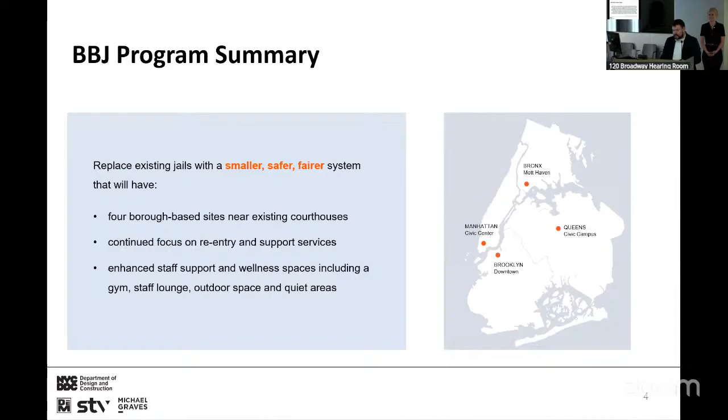The team here today has representatives from the DDC, our program management consultant, the AECOM Hill Joint Venture, or the AHJV, DOC, CHS, MOCJ, as well as City Hall, and our design builder, the DeMattis-led DB team. I'll now pass it off to Lauren Messier from the AECOM Hill Joint Venture. She's our outreach manager to discuss program-wide community engagement. Thank you.

Great, thank you Freddie. Hi everyone, good afternoon. My name is Lauren Messier. As Freddie just said, I'm the outreach manager for the Borough-Based Jails Program. Extensive engagement with communities and stakeholders in each of the 4 boroughs as a core component of our program, in addition to the broader team's ongoing collaborative work with city agencies and service providers.

Our team leads direct and proactive engagement with elected officials, community boards, justice advocates, and community advisory groups. Those typically consist of community leaders, community organizations, as well as the residents and businesses immediately surrounding the sites who are most impacted by the project. We also have dedicated staff embedded at each one of the sites to keep communities informed of day-to-day progress.

To date, we have held nearly 300 meetings and hands-on workshops with a variety of different groups. Engagement with our elected officials, community boards, and advisory groups will continue through construction completion in all of the boroughs. We are absolutely committed to that. In addition, we are currently in the process of holding design workshops with the communities in the Bronx, Manhattan, and Queens. We've already completed a series of workshops with Brooklyn.

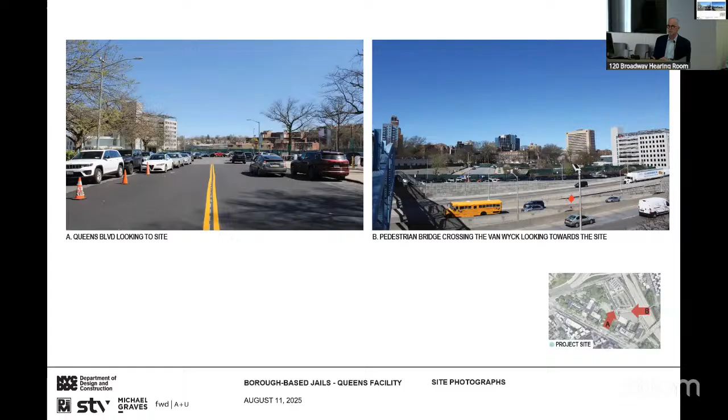It happens to sit on high ground overlooking the watershed of Corona Park and Flushing Meadow. The site itself is quite open with long view visibility from all sides, and the building will be a major landmark in the district.

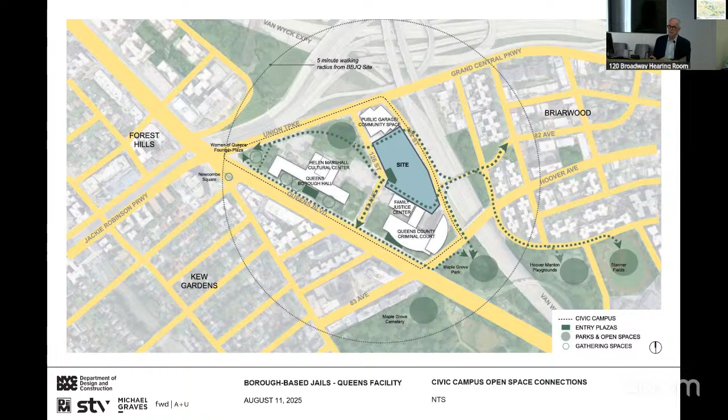When the site is infilled with our new building, it'll reinforce an existing pedestrian network that goes through the site, connecting across to Briarwood, and our aim is to reinforce that pedestrian experience with the landscape treatment.

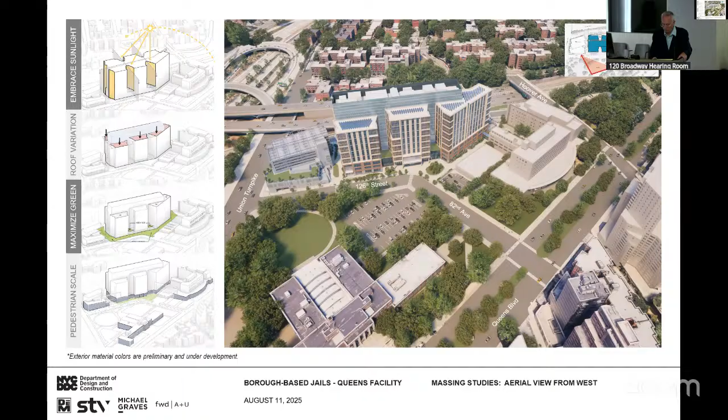This is an aerial perspective, a flat elevation that starts to show the main elements of the building. We wanted to keep the organization as clear as possible, break down the scale of the building, and reinforce the idea that this is a campus at ground level, reinforcing that pedestrian experience that Frank talked about.

To do that, we've broken the building down into 3 major components. The bottom 3 to 4 floors is the podium, which contains all the program spaces of the building and support spaces, things like admissions, main lobby, and so on.

The second part is the towers, which contain the cells and the population, as well as a continuous, glass-clad spine that unifies the design and connects all of these different pieces together, both building systems and building circulation.

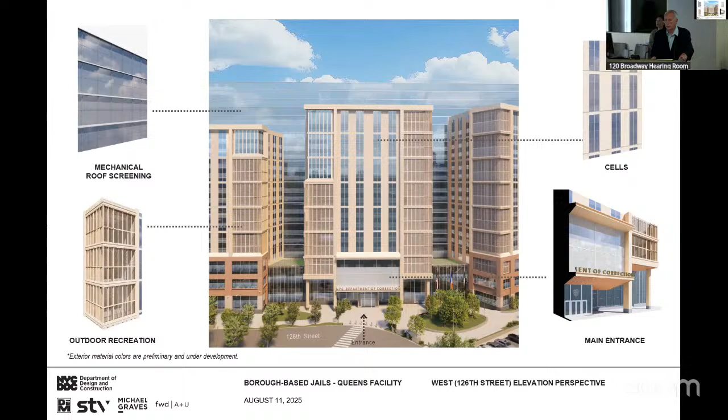Here's more detail of how the facades are composed. This is the main entrance facade in the center. Top right is the facades at the towers, showing how the windows follow the groupings of the cells. Bottom right is a cutaway section showing the entrance to the facility. Top left is the glass-clad, transparent and translucent glazing for the spine, and bottom left is the exterior recreation areas adjacent to each housing unit.

You also see, Joni will talk about this more, but see the way that the main plaza really is set back and engages the building at the ground level.

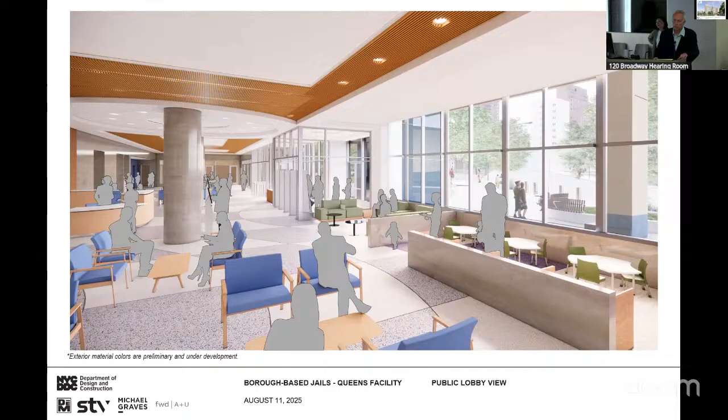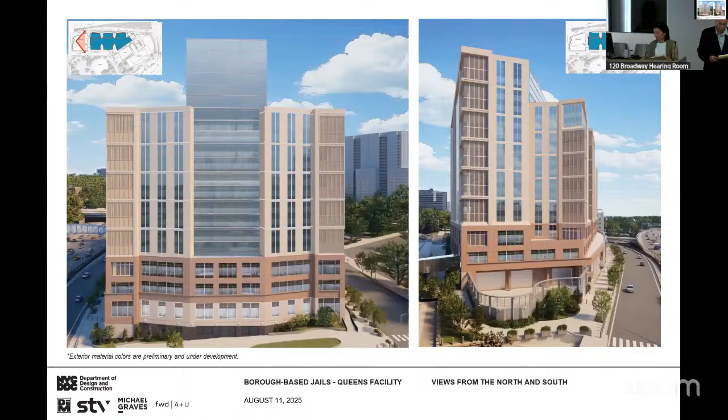Thank you, Tom. I'm Joni Fu of Fu Wilmers Design. I will take you through public realm design and landscape. Our goal is really to extend the Borough Hall Park, centered around the civic campus, to our site.

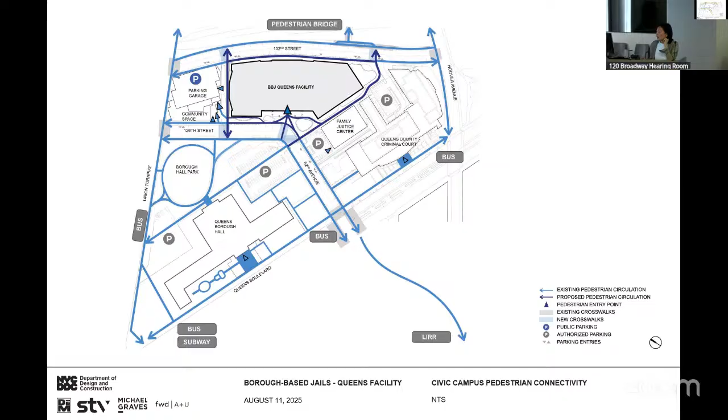Front entrance is directly off 82nd Avenue. Staff entrance and the community entrances and parking garage entrance are off 126th Street, directly across the park from Borough Hall. Vehicular entrances are all along 132nd Street, so there are no conflicts between pedestrian and vehicular circulation.

Here on the site plan, you can clearly see the spaces defined: a generous front plaza at the main entrance, and pedestrian passageway in a landscaped, garden-like environment, and 132nd Street at the back on top of the page. So we will take a quick walk around the building.

This is the 82nd Avenue entrance to the front of the building. To the front of the building, here's the staff entrance. If you're coming across the park, looking back at the staff entrance in Borough Hall Park again.

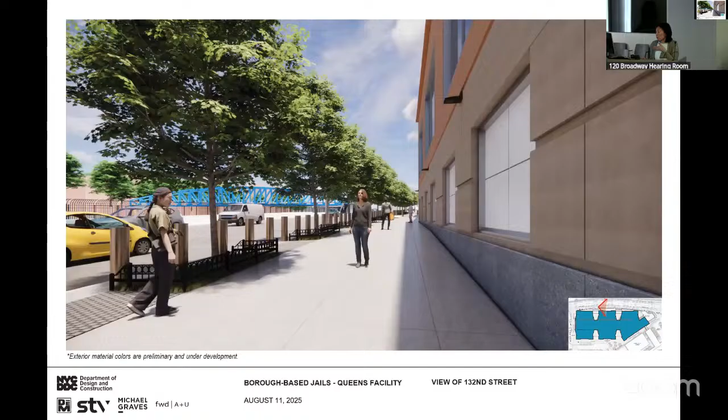This is the community passageway between our building and the parking garage, and 132nd Street with a view of the Briarwood pedestrian bridge. Coming off the bridge, you would have a landing park nearby the courthouse, and coming around the landing, bridge landing...

...you would enter this courthouse passageway looking towards Borough Hall Park at the end there, and coming around to the front of the building again with a very generous planting bed.

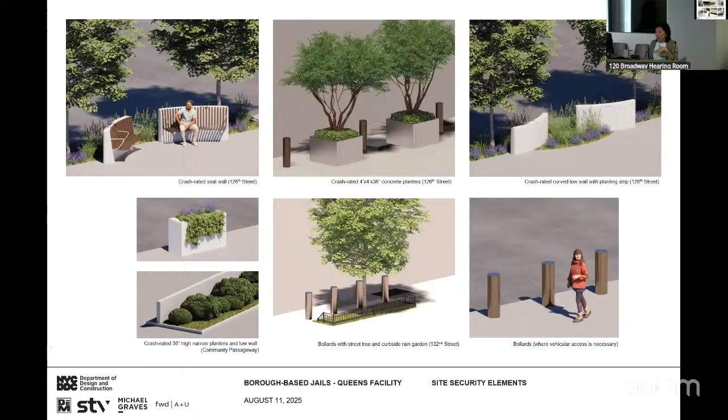All the security elements of the facility are carefully integrated into the streetscape. We have anti-ram walls, knee walls, planters, and whatnot, and bollards are only used intermittently and where necessary. The street lights and street furniture are DOT and DEP approved.

Colors are very neutral and understated to work with the architecture, and landscape is low maintenance and native plants. Green infrastructure and sustainability is considered throughout the design. We will end with a view, the main entrance view here.

So at the back of the Borough Hall is this generous park, and we're divided from the park by 126th Street, which is streetscape per DOT standards with street trees and tree pits. Instead of bollards, we have knee walls with some benches mounted on them, facing the sidewalk, plus seating underneath the trees, and seats mounted around the two planters.

Do you anticipate the primary use of those seats will be people visiting and using this facility, or are they designed to be more broadly used for people working in Borough Hall or elsewhere in the neighborhood?

There is some seating in the existing Borough Hall Park, but not a lot. The seating here is probably more for people waiting or coming and going to our building, which is why it's focused near the entranceway. We also have seating in the community passageway between the staff entrance and the community space, specifically to address community use there, and less so elsewhere, since that's where we imagine most people would gather.

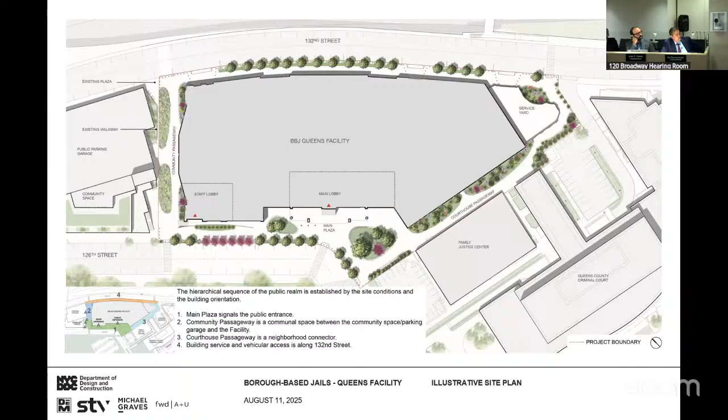I was going to do number of beds. To clarify on program changes since the last presentation to the commission back in June, which was for the Bronx facility, my name is Taylor Wolfson-Ospen, nice to be here. There are some programmatic differences between the Bronx and Queens facilities in that they have the same number of beds, both 1040, but the Queens facility does have women's, as mentioned, which the Bronx facility does not. Other than that, there have been no changes from what was approved by ULURP back in 2019.

In terms of lighting, on 132nd and 126th Street we're using DOT standard street lights. In the front main plaza area we'll have tall pedestrian poles, and we also have lighting for the 3 flag poles. For the pedestrian passageway, we're using building-mounted lights, similar to Rockefeller Center, mounted above the first floor. The reason is we want to save the precious pathway or sidewalk space, so it's well lit but doesn't take up the ground plane. So all the surrounding site lighting has been considered.

When you say well lit, even during wintertime, were your calculations based upon that? Absolutely, yes.

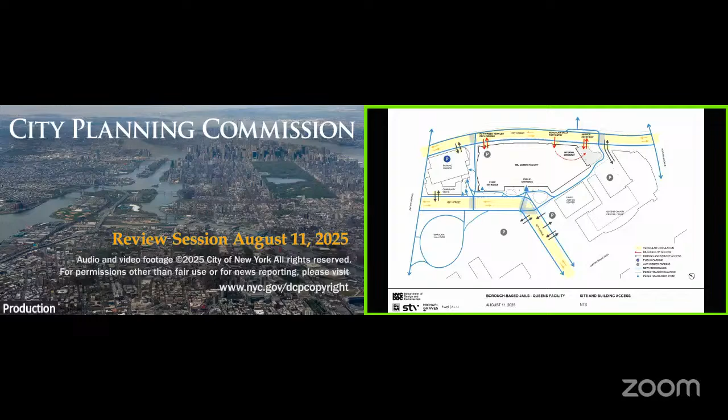Well, that's what we're planning for. And my second question, I'd still like to know where that, not just the loading on the buses, but where within the facility, presumably on the first floor, the intake when detainees come back from their court dates and before they leave, when they are assembled and whatever administrative work is done to make sure that the right detainees are at the right place at the right time on the right bus. It's extraordinarily complicated, what you just mentioned.

It's what we've spent the last 18 months sorting out with Department of Correction. And it's doubly complicated because you have men and women in those same streams and they can't touch, they can't see each other. So we've developed a throughput piece on that, and we're actually in pretty good shape right now. Alex, I think we've got it sorted, because you're right, in and out are both very complicated. And as well as the walking across the bridge into the Queens Courthouse. So we've got all these different streams, and I think we've solved it, but I'll let Alex speak to the officers themselves who have to have access to this whole area, but others can't leave.

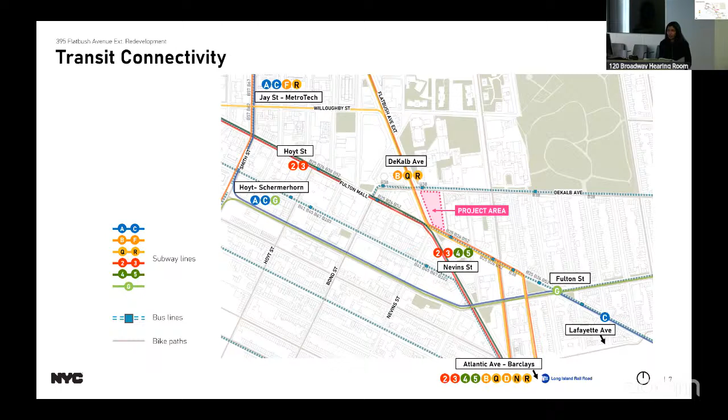The project area is located within the Special Downtown Brooklyn District, established in 2001 under the Unified Bulk Program, which exempted the area from certain height limits, instituted modest density increases from manufacturing to commercial and residential districts, and mapped contextual transition areas alongside the edge of the CBD.

Subsequently, as part of the 2004 Downtown Brooklyn Plan, high-density zoning was put into place to facilitate growth of the Central Business District. Blocks surrounding the project area are predominantly zoned with higher density commercial districts, C5-4, C6-4, C6-4.5, and C6-9, as well as mid-density residential districts R6, R6B, and R7A along the periphery of the CBD.

The project area is located in a C6-4 zoning district, a high-density, non-contextual district allowing a range of commercial, residential, and community facility uses. C6-4 districts mapped within the special district are governed by tower regulations or special height and setback regulations. The site is also subject to other mandatory district requirements such as street wall continuity, curb cut restrictions, etc.

The entire Central Business District is located within the inner transit zone, where no parking requirements are mandated for new residential buildings.

The project area is currently improved with a 7-story, approximately 307,000 square foot commercial building constructed in 1974. The building has 274,000 square feet of commercial office space, which currently houses a Verizon call center, and approximately 33,000 square feet of ground floor retail. There is a below-grade public parking garage with 140 parking spaces.

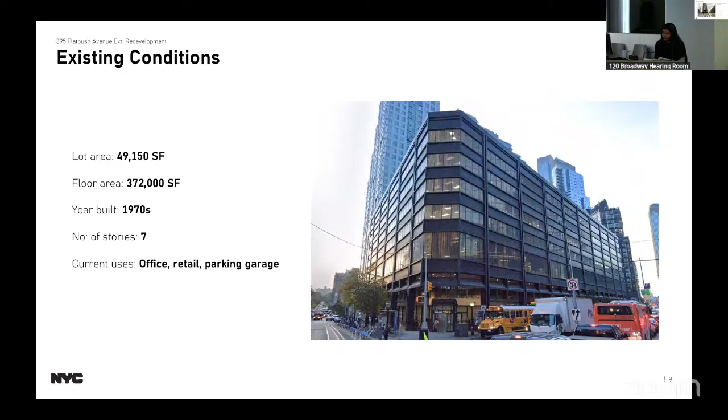This is a view along Flatbush Avenue at Fulton Street looking north. The project area is to the right of the image. And this is a view looking towards the south along Flatbush Avenue. The 80 Flatbush, 505 State Street development is seen in the background.

This is a view looking along the existing arcade at Flatbush Avenue looking south. And this is a view from Fox Square at Fulton Street looking east. The dedicated bus lane runs along the project area to the left of the image.

This is a view from Fox Square Plaza, located at the corner of Flatbush and Fulton, looking towards the development site.

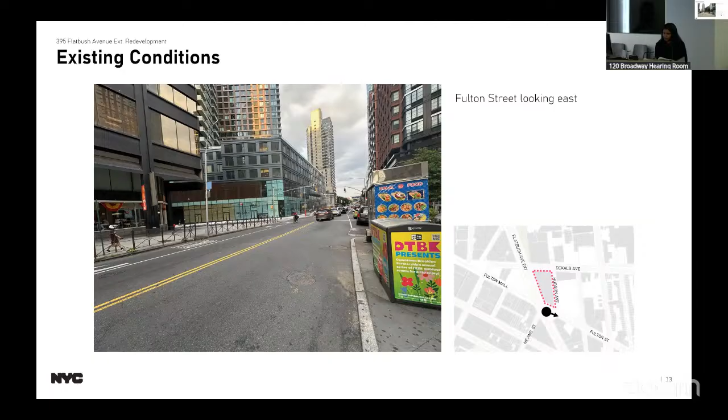This is a view along Hudson Avenue, looking north towards DeKalb Avenue. The recently constructed 625 Fulton development is located on the right side of the image.

And this is a view of Hudson Avenue looking south. The existing curb cuts and parking garage entrances are seen on the right.

Here is a view of DeKalb Avenue looking west, with the Paramount Theater seen on the right side of the image. And this is a view of DeKalb Avenue looking east towards Fort Greene Park. The LIU campus is seen on the left.

And this is a view of the existing subway station entrance on site, which is to remain at the corner of DeKalb Avenue and Flatbush Avenue.

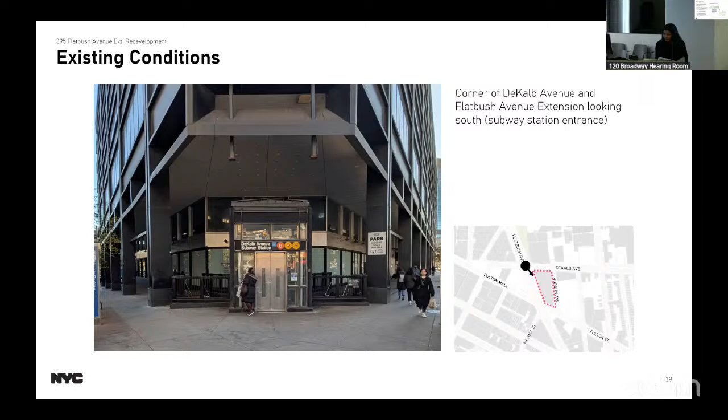Planning and investment efforts over the last two decades to stimulate development in downtown Brooklyn has spurred significant increases in housing and job growth. In an effort to help guide the DB's continued evolution and highlight its important role in the borough and region, the department presented the EDS and MEDS framework to the CPC in 2023. The framework identified goals and opportunities to implement new highest density zoning tools, promote an economically equitable, diverse, and integrated neighborhood, and explored redevelopment opportunities on public land to facilitate affordable and mixed-income housing, job space, and community-serving uses, specifically in the educational and medical sectors.

The proposed development at 395 Flatbush is a 72-story, 1 million square foot mixed-use development with approximately 933,000 square feet of residential floor area, 141,000 square feet of non-residential floor area, and approximately 4,700 square feet of public open space. The building would contain approximately 1,263 apartments, of which 325 to 379 would be income restricted pursuant to MIH.

Roughly 66,000 square feet of retail space is proposed on the first and second floors, and approximately 75,000 square feet of commercial office or community facility is anticipated on the upper floors of the podium. The non-residential space is currently contemplated to be occupied by a DOHMH facility with anticipated uses including a medical clinic, offices, community facility, and labs.

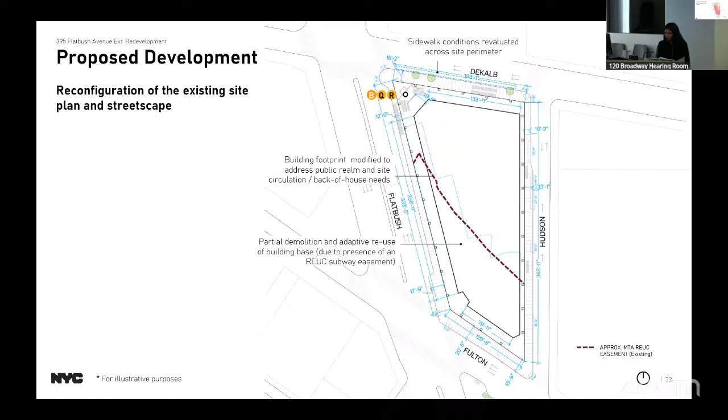The proposed development will eliminate the existing arcade, pulling the street wall to the property line, bringing the retail to the sidewalk to be more inviting and visible. The proposed development will also include expanded sidewalks, particularly along Flatbush Avenue, up to 18 feet to increase pedestrian circulation space, achieved by eliminating the parking strip along Flatbush Avenue in coordination with DOT.

The residential lobby would front on DeKalb Avenue at the corner of DeKalb and Hudson, while the commercial lobby entrance is located directly east of the DeKalb Avenue subway station entrance.

Ground floor retail uses are proposed along Flatbush, Fulton Street, fronting the open space, as well as on the southern portion of Hudson Avenue. Similar to the existing conditions, the loading berths and parking access will remain located along the development site's Hudson Avenue frontage.

The partial demolition of the building will also facilitate the creation of a 4,700 square foot public open space. The open space location at the prolongation of Fulton Mall is intended to contribute to the existing public realm network while enhancing the retail environment at this important intersection.

The open space will be designed to support pedestrian movement, integrate seating, and introduce landscaping that contributes to the district's transformed public realm and enhances connections between surrounding open spaces. The open space design has been developed in consultation with DCP and is to be further refined through the Public Design Commission's approval process.

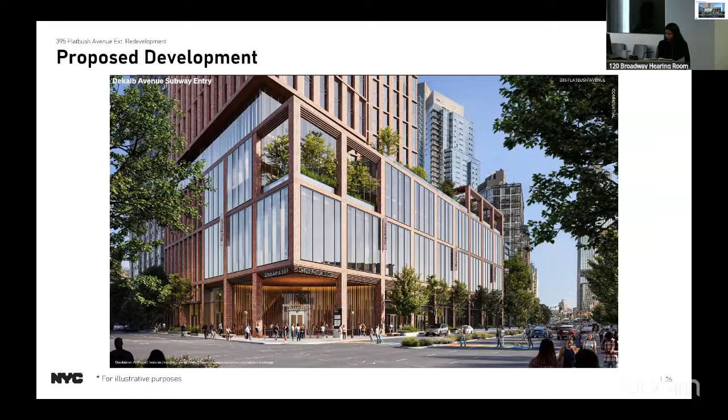This is an illustrative view of the proposed development along the Flatbush Avenue frontage. The building base is expected to continue to have a strong non-residential presence with ample glazing.

And this is an illustrative view of the proposed development and open space along the Fulton Street frontage. The proposed development is anticipated to be 100% electric and is targeting sustainability certifications such as LEED and WELL. As noted earlier, a significant portion of the podium structure is anticipated to be reused, taking advantage of the embodied carbon of the existing building.

The recent City of Yes for Housing Opportunity text amendment introduced new zoning districts such as C6-12 that have increased the permissible residential FAR to greater than 12 FAR, which was previously prohibited due to the New York State multiple dwelling law cap, which has since been eliminated.

The applicant is proposing to rezone the project area from a C6-4 district to the newly created C6-12 zoning district, as further modified by the special district and in conjunction with a proposed zoning text amendment. The zoning district boundary would encompass the entirety of Block 2093, bounded by the center lines of the surrounding streets.

The applicant is also seeking to modify the floor area provisions to permit greater FARs than allowed in the underlying C6-12 regulations if certain conditions are met, which I will walk through in the forthcoming slide.

The proposed C6-12 zoning district within the downtown Brooklyn district will be governed by height and setback regulations of the special district, which allow either standard height and setback regulations up to a maximum height of 395 feet with qualifying affordable housing, or tower regulations. Under tower regulations, towers located above the base in C6-12 zoning districts are regulated by lot coverage with no set maximum height limits.

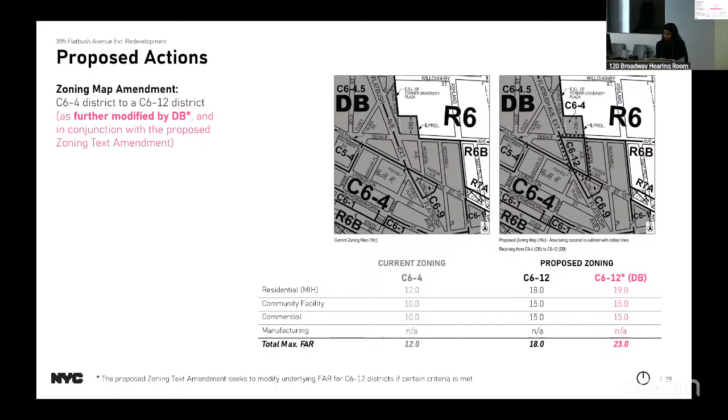The applicant proposes amendments to the special downtown Brooklyn district's floor area, bulk, and mandatory district plan elements to facilitate the proposed development. First, the text amendment proposes to create a new defined term, large qualifying site, which is zoning lots that occupy an entire block or are a minimum of 30,000 square feet with at least one full block frontage along a street. On large qualifying sites, the C6-12 district, as modified by the special district, would permit a maximum FAR of 19 for residential, 15 for commercial and community facility uses, and a total maximum FAR of 23.

The proposed FAR regime is intended to permit increased housing capacity that would include affordable housing subject to the MIH program, while also providing additional floor area that may be used for retail and additional commercial or community facility establishments that are intended to help further the goals of the DB and special district.

The applicant is proposing to modify setback requirements for zoning-defined large qualifying sites that have below-grade transit infrastructure occupying more than 30% of the zoning lot. Up to 30% of the total street wall width of the development would be exempt from setback requirements. This would provide a pathway for sites constrained by significant infrastructure to accommodate viable building forms, particularly for developments which have certain dimensional and vertical circulation needs.

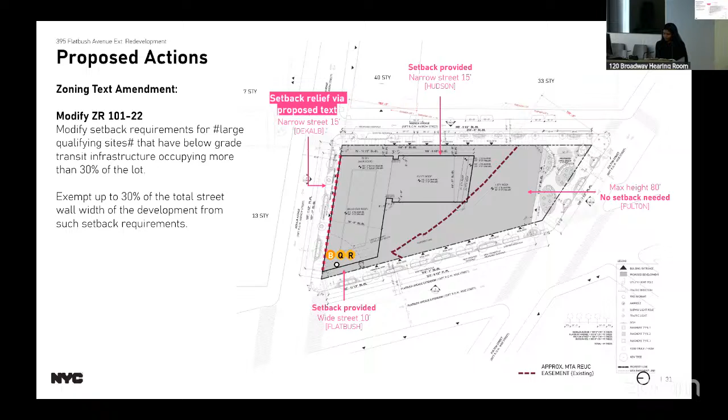Currently, the special downtown Brooklyn district mandates a continuous street wall at certain locations, including along the project site's Flatbush and Fulton frontages. The applicant is seeking to amend the street wall location provisions. The proposed modification would provide exemptions from the street wall location and continuity requirements for zoning-defined large qualifying sites if publicly accessible open space is provided.

A zoning text amendment is proposed to Appendix F to establish the project area as an MIH area. The applicant proposes to map MIH options 1 and 2. Under option 1, at least 25% of the residential floor area must be permanently affordable to households with incomes at a weighted average of 60% AMI. And under option 2, at least 30% of residential floor area must be permanently affordable to households with an income at a weighted average of 80% AMI. The applicant proposes utilizing MIH option 1.

HPD and DCAS are seeking a disposition action to allow Brooklyn Block 2093 Lot 1 to be conveyed to a sponsor selected by HPD. DCAS and DOHMH are seeking site selection and acquisition approval to facilitate the location of a potential clinic and office space for DOHMH. DOHMH is in need of additional clinic and office space to expand, modernize, and streamline their services in downtown Brooklyn. Given the proposed development's location with access to several transit resources, a potential DOHMH clinic within the building base was identified as an effective option for consideration.

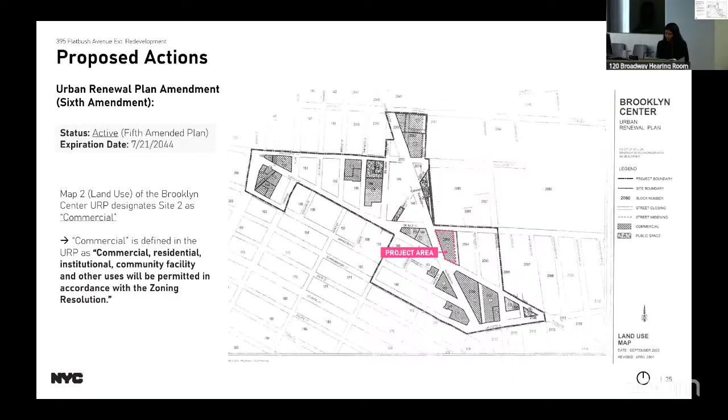The applicant is seeking to amend the Brooklyn Center URP. This would be the sixth amendment. The applicant is seeking to extend the plan's duration to 99 years from the date of approval of the Sixth Amendment. The applicant is also proposing modifications to Section 3A, Supplementary Controls on Sites. The URP would require that a portion of the project area, Site 2, be developed as open space accessible to the public, as approved by HPD and in consultation with CPC.

Pursuant to Local Law 78 of 2021, this application requires a racial equity report. The project area is located in the Fort Greene neighborhood tabulation area, and the displacement risk score is intermediate. As of 2021, the median household income in the neighborhood is approximately $119,000, significantly higher than the New York City median of around $70,000. The applicant is proposing MIH option 1 with incomes at a weighted average of 60% of AMI.

The income of households occupying the proposed income restricted units is estimated to be within the range of $45,000 to $162,000, and the monthly rent would be between approximately $1,100 and $3,600.

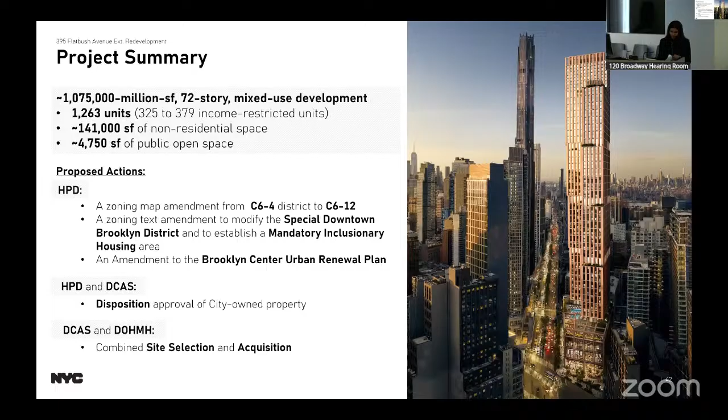A lot in there. I have just one question, and then I'm going to go to Commissioner Benjamin, perhaps others. On the urban renewal plan expiration and renewal, two things. One, you noted that there will be a new provision included in the urban renewal plan that a portion of Site 2 will be accessible to the public.

As open space, correct? That's right. That's a new provision. That is correct. And that's something that could be incorporated through the amendment to the urban renewal plan.

That's right. And how big a portion would be reserved to the public as anticipated in this amendment? The amendment doesn't specify how much open space, it just requires that some amount of public open space be located. In this case, the applicant is proposing roughly 4,700 square feet. Okay.

But under the urban renewal plan, if they ended up doing 10 feet, it would be consistent. Yes, there is no minimum specified. Right, okay, got it. Okay, I mean, I do think it's a good addition. I think we should include that in there.

Okay, and then the renewal or the extension of the term. How should the commission think about the extension of an urban renewal plan that's set to expire in 2044 and to bump it out to 99 more years? Sure. In this case, the applicant is expecting to renegotiate a ground lease with the potential sponsor, and this is supposed to be a 99-year term, and therefore they are seeking to amend the plan duration to be coterminous with that new ground lease term.

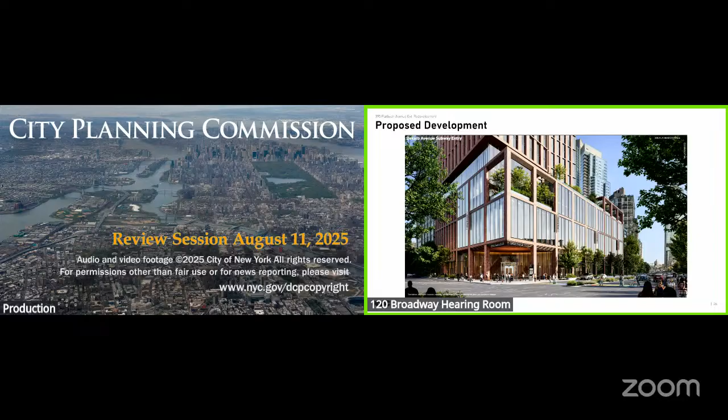Not having spent a lot of time studying the subway station, but just found it a little peculiar given the density here and the important subway station that wasn't more integrated into the overall development framework.

And then just last question on the 18 versus 19 FAR. I found this one a little bit head-scratching. So the new zoning district, the C6-12 that was created, has an 18 FAR base for residential. That's right. And here for large sites, HPD is proposing 19. Is there a logic to that?

Yes, so the proposal seeks to increase the overall amount of residential by around 1 FAR, which we believe adds an additional FAR to what would generate MIH, and the overall max also goes up by roughly 5 FAR, which allows for additional non-residential in the podium of the development. So that's kind of the logic behind the regime here.

Okay, but I'm not sure how the additional FAR of residential adds more FAR of non-residential. Sorry, no, I mean the total max, not the residential. The residential is just a 1 FAR increase compared to the as-of-right C6-12 regulations.

Got it. Okay. Yeah, I'm not sure I totally follow the logic on this point. Not that I'm disputing the 19, just trying to understand why, after we just created the zoning district, we're creating new FARs for that district that was just created. So I guess we'll wait for the public hearing to conclude the suspense on that question.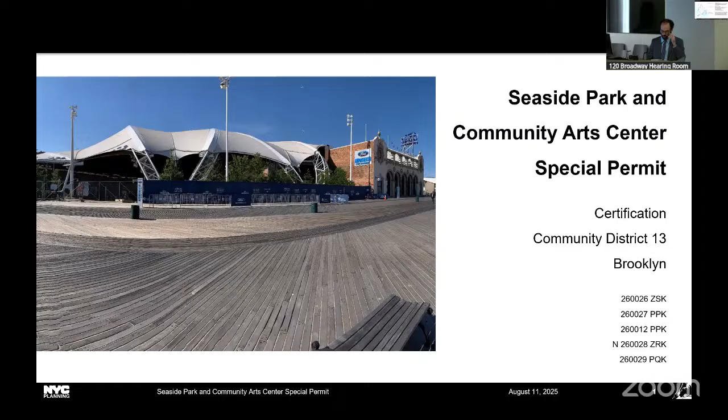The project before you today is the certification of the Seaside Park and Community Arts Center special permit. There are three applicants for this project: the private applicant, Seaside Park LLC, as well as the New York City Economic Development Corporation, or EDC, and the New York City Department of Citywide Administrative Services, or DCAS. The project is located at 3054 West 22nd Street and encompasses 15 tax lots in Block 7071 in Coney Island, Community District 13 in Brooklyn. It is located in City Council District 47, the district of Councilmember Justin Brannan.

The proposed development includes approval of the Coney Island Amphitheater via a new special permit with waivers for signage, parking, and loading, as well as a series of acquisitions and dispositions that will enlarge the project area to include additional open space on this site.

There are five actions being requested today by the applicants. The first is a zoning text amendment to multiple sections of the ZR to allow the CPC to permit an arena by special permit. The second is a special permit application for said arena. The third action is the acquisition of a portion of Block 7071, Lot 123. Finally, there are two separate dispositions: one restricted by the conditions of the special permit for the entirety of the project area, and another separate disposition of the adjacent Child's building and a small sliver adjacent to it, which is not restricted to the conditions of the special permit. These actions are being sought to allow the continuation of the existing Seaside Community Arts Center, an expansion of Seaside Park, and to reflect changes to the site since its original approval in 2013.

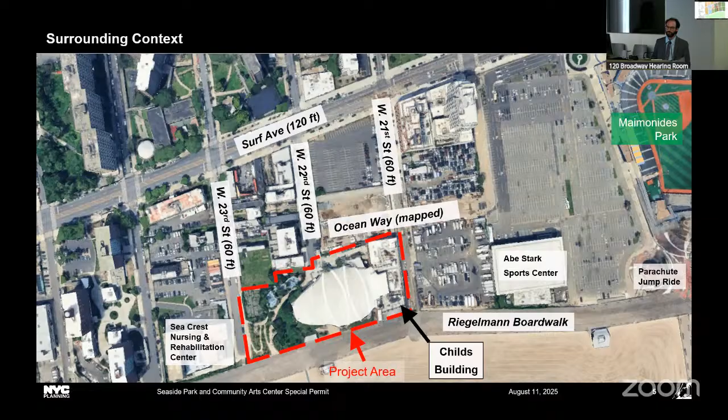This is an area map showing the project area outlined in red. Land uses in the surrounding area vary significantly, as much of the area is under construction for the goals of the Coney Island rezoning plan, which I'll discuss in a moment. Retail uses are concentrated to the north along Surf Avenue, whereas several institutional and utility uses are located directly to the west of the project area.

Existing infill developments in the neighborhood range in height from 1 to 6 stories, whereas several tower-in-the-park style NYCHA and Mitchell-Lama developments are present in the area and rise to between 13 and 22 stories in height.

The zoning of the project area is split between an R5 district, generally mapped to the west of West 22nd Street, and an R7D C24 district mapped to the east over the Childs building. On Parcel B within the Coney West subdistrict, which is the eastern part of the project area, R7D districts have a maximum permitted FAR of 4.8 for standard residences and 5.8 for buildings including qualifying affordable housing. Within 70 feet of the boardwalk, the maximum base height is 40 feet, and the maximum transition height further from the boardwalk is 95 feet. Above 95 feet, tower regulations apply.

C24 districts permit all local retail uses as well as offices and select laboratories. When mapped over R7D districts, commercial uses are permitted up to 2.0 FAR. 1 parking space is required per 1,000 square feet of commercial floor area, and parking requirements are waived when fewer than 40 spaces are required. You can see to the east here, per the C24 overlays, a number of streets which are mapped as part of the Coney Island rezoning plan and are proposed for construction and under construction, and I'll go over these more in a bit.

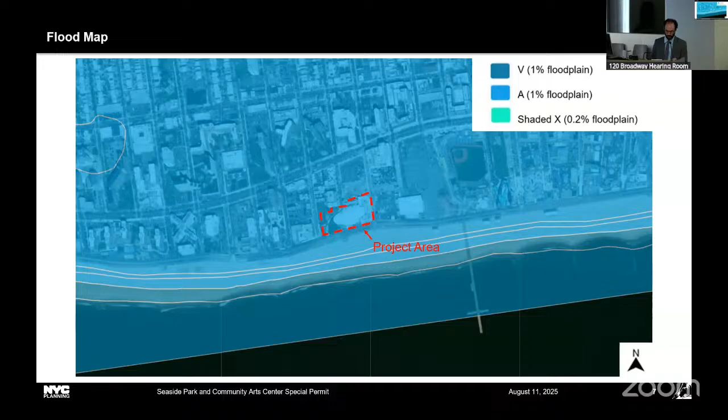The Coney Island Comprehensive Rezoning Plan was approved in 2009 and created the Special Coney Island District, as well as the Coney West Subdistrict, which is the home of our project area today. The comprehensive plan was intended to facilitate a year-round amusement and entertainment district, ensure redevelopment of vacant and underutilized land in the area, strengthen Surf Avenue as a central retail and pedestrian spine, support Coney Island's unique character, and facilitate economic revitalization of the peninsula.

3 sub-districts were created in 2009: the Coney East Sub-District, which is the heart of the amusement area; the Coney North Sub-District, which is designated as a mixed-use residential and retail area along Surf Avenue connecting Coney East and Coney West; and finally, the Coney West Sub-District, the home of our project area today.

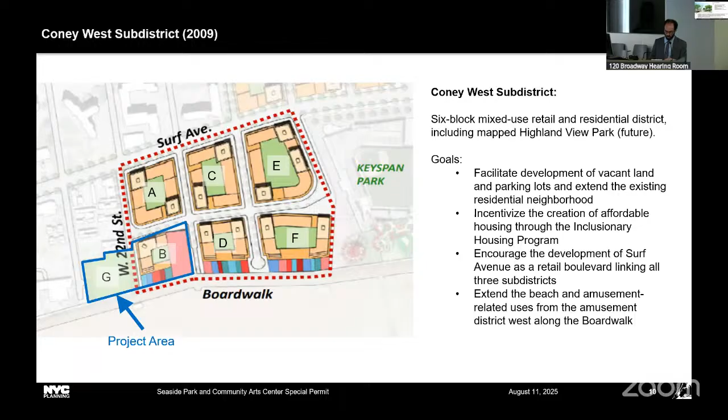In 2013, the CPC approved 7 actions within the Special Coney Island District, including the enlargement of the Coney West Sub-District to include the aforementioned Parcel G, to facilitate the development of public open space and the restoration of the Child's Building.

Further, included in the project was the creation of a special permit to allow an amphitheater for up to a 10-year term. The goal of siting an amphitheater in this location was to create a temporary active use that would stimulate the underutilized area while the infrastructure and sewer improvements were made that were necessary to realize the vision of the Coney West Subdistrict.

The special permit was granted for a 10-year term, and a temporary Certificate of Occupancy was granted in 2016, which marked the beginning of that 10-year term.

Since 2016, the Coney Island Amphitheater has promoted and held approximately 150 ticketed events, 30 free shows, and 160 graduation ceremonies, featuring some of the most famous acts in the country.

The Child's Building has hosted events and weddings, and when it's not reserved for special events, it serves the public as a full-service restaurant.

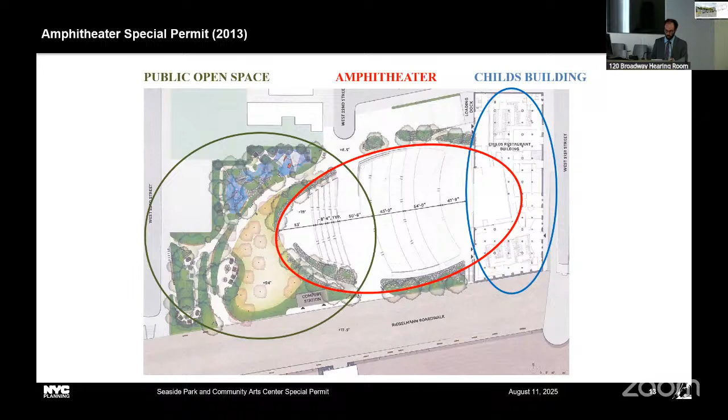So that takes us to where we are today, and I'd like to show you at this point a few photos of the site. I'm going to begin by showing photos of the periphery of the site, looking into it, moving counterclockwise, before showing a few photos of the interior of the site itself.

This photo here shows the amphitheater itself, with the historic Childs Building in the background, as seen from the boardwalk.

This photo shows the roof structure of the amphitheater, which is proposed to be permanent during on and off seasons. This photo also shows fences and a visual screen beyond the metal detectors. These items were not part of the original 2013 approval, but have been added to the site since.

This image shows the historic Childs Building looking north along West 21st Street as seen from the boardwalk.

This photo shows essentially the opposite view of our previous image. This shows the Childs Building on the right looking south towards the boardwalk along West 21st Street.

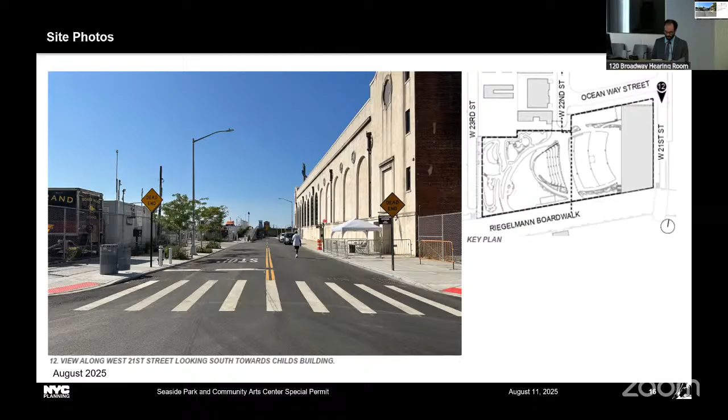This image shows a view of the project area from West 22nd Street with newly constructed Ocean Way to the left. Here you can see the end of the street and the southern entrance to the amphitheater. The sound curtains around the periphery of the amphitheater can be seen in this image as well.

This image shows the public open space in the background, but seen in the foreground are two tax lots, lots 79 and 81, that are now being added to the project area and will be redeveloped into an expansion of the existing open space.

This image shows another view of the open space on the site from across West 23rd Street. Beyond the fence are the two lots discussed in the previous slide that are now being added to the project area as expanded open space.

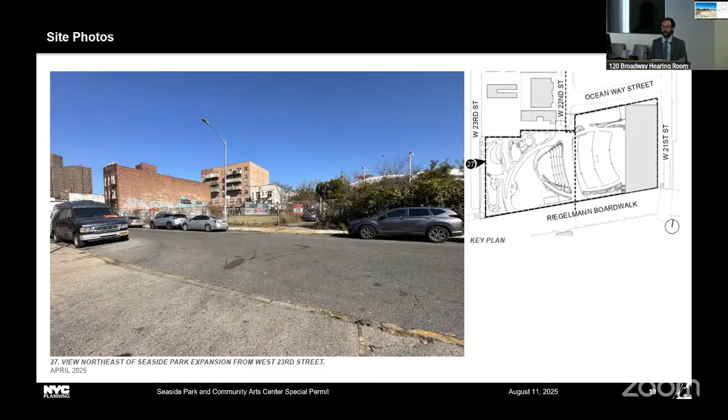I'd like to now show some photos of the interior of the site. This image shows one of the pathways within the public open area within Seaside Park. And this image shows a constructed playground located within the northern portion of the public open space.

I'd like to now show some photos of the interior of the amphitheater itself. This is an image of the amphitheater looking south from West 22nd Street towards the boardwalk. Here you can see the bleachers at the rear, which serve as additional seating during events.

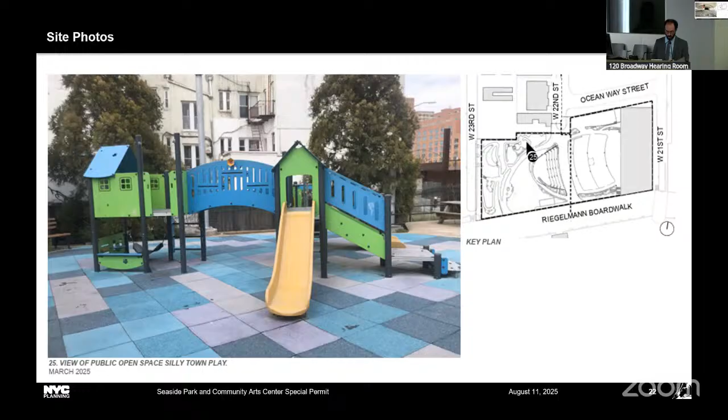This is an image of the amphitheater facing east from the rear towards the stage, which is built into the interior of the adjacent Childs Building. And finally, this is an image of the amphitheater facing north towards West 22nd Street.

This pathway connects West 22nd Street to the boardwalk and is accessible to the public when events are not being held. You can also see a sound curtain at the periphery of the amphitheater, which is proposed to remain year-round.

The applicant is proposing approval of the Coney Island Amphitheater per a new special permit, with waivers for signage, parking, and loading. The special permit application will also codify existing conditions on the site.

Additionally, the proposal includes a portion of Lot 123 adjacent to the Childs Building, as well as the enlargement of the project area to include the additional open space on Lots 79 and 81, which are seen here in gray.

You can see here the proposed design for that expanded open space, outlined in that white dotted line. This area will feature an at-grade entrance along West 23rd Street, as well as an accessible path that connects to the existing pathway on Seaside Park.

The EDC has confirmed that they have coordinated with the Public Design Commission and the Department of Parks and Recreation on the open space design in this area.

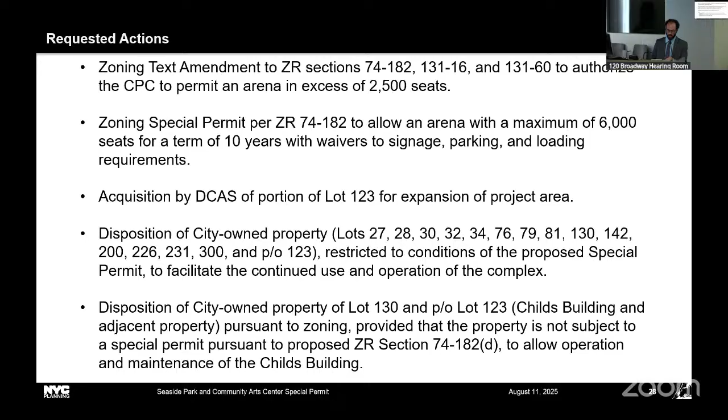The zoning text amendment makes changes to Section 74-182, 131-16, and 131-60. The proposed text moves the special permit from Article 13, Chapter 1, which is where regulations on the Coney Island Special District live, and moves them to Article 7, Chapter 4, which is where special permits for arenas, auditoriums, stadiums, and trade expositions live citywide.

These changes would result in a simplified special permit text that ensures operational use and functionality of the facility while also allowing flexibility for a future operator. The proposed text amendment aligns most of the conditions and findings with those for other similar facilities and removes aspects of the existing amphitheater special permit text that require components of the project that are no longer operationally feasible, such as the removable roof.

During the off-season, when events are not being held, the amphitheater will remain publicly accessible. The interior walkway and corridor will provide access from West 22nd Street to the boardwalk when events are not being held, as previously mentioned.

In the middle of the site is the amphitheater, which will remain essentially as it exists today. To the west, Seaside Park will be expanded to include lots 79 and 81, shaded in orange. Shaded in blue to the east is the historic Childs Restaurant building, which will continue to be tenanted with eating and drinking uses and houses the stage for the amphitheater.

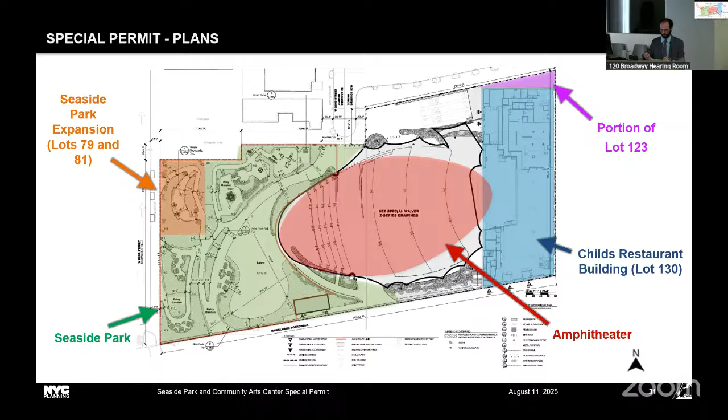This image shows the floor plan for the main floor of the historic Childs Building located to the east of the amphitheater. Note that we're now facing east, not north, with the amphitheater at the bottom of your screen. Again, you can see the stage is housed within the Childs Building.

You can also see the development of the building as a restaurant accessible from the boardwalk. Adjacent to the building, shown in purple, is the aforementioned portion of Lot 123 that will now be acquired and disposed of along with the Childs Building.

Per the special permit, waivers of underlying parking, loading, and signage regulations are being sought. Regarding parking, the underlying zoning requires 66 parking spaces, and according to the applicant there is sufficient public transportation and ample parking in the neighborhood, negating the need for this additional parking. As such, no on-site parking is being proposed.

Loading and signage waivers are also required, and I'll go over these details in the next slides. Generally, loading waivers are requested due to not the number of berths provided, but their location. Finally, signage waivers are required to allow a greater square footage of signage, as well as a waiver from underlying locational regulations on signage.

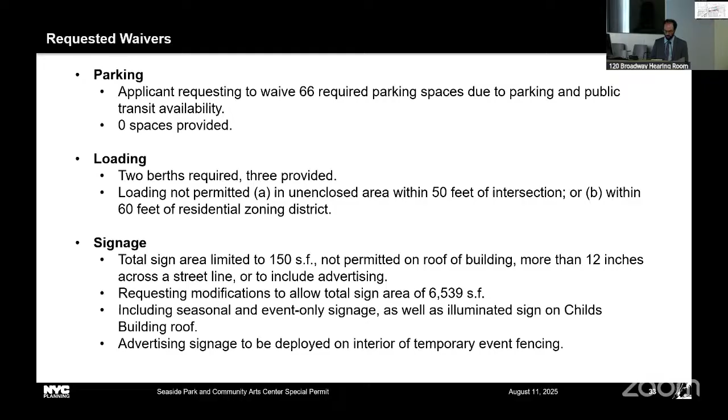To speak more to the loading waiver, the applicants are proposing an off-street loading area with 3 berths. This exceeds the 2 berths required by zoning. However, the loading area is located in an unenclosed area within 50 feet of the intersection of West 22nd Street and Ocean Way, and would be located within 60 feet of a residential zoning district. Loading berths as proposed in these areas are not permitted by the underlying zoning, and therefore a loading waiver is requested.

For the underlying signage regulations, total sign area is limited to 150 square feet per frontage. Further, signage is not permitted to be mounted on the roof of a building, to project more than 12 inches across a street line, or to include advertisements.

The applicants are requesting modifications to allow a total sign area of 6,539 square feet, including seasonal and event-only signage, as well as permanent signage for the provision of an illuminated sign on the roof of the Childs Building. Further, the applicants are proposing advertising signage to be deployed on the interior of the temporary fencing erected during events. As such, a signage waiver is being requested.

Here I will discuss the zoning text amendment and special permit actions being requested. Below is a summary of the new findings. To approve the special permit, the CPC must find the following: first, that vehicular traffic will be minimized through residential areas, and there will be consideration of rapid transit infrastructure to serve the proposed use. These conditions are standard for all arenas, auditoriums, and stadiums throughout the city.

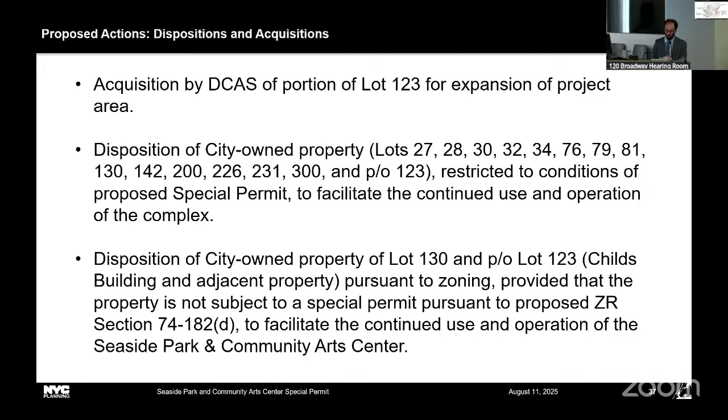This disposition is proposed to include the expanded project area, including the new lots 79 and 81, as well as the newly acquired portion of Lot 123.

The intention is for this disposition to be utilized only after the amphitheater is no longer in use, so that the Childs Building can continue to be maintained and tenanted, regardless of the expiration of the special permit governing the amphitheater.

In summary, the applicants are requesting 5 actions: a zoning text amendment to authorize the CPC to permit an amphitheater via special permit; an application for said special permit to allow the amphitheater; an acquisition of a portion of Lot 123; a restricted disposition of the full expanded project area; and a separate disposition of Lot 130 and a portion of newly acquired Lot 123 to allow maintenance and operations of the Childs Building unrestricted to the conditions of the proposed special permit.

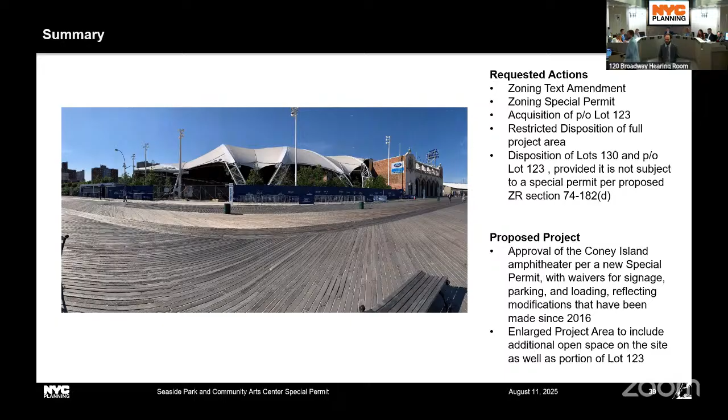Great, let's move on. The third item on our agenda is a certification of zoning map and zoning text amendments in Queens Community District 1. Our presenter is Colin Ryan. Hello, Colin. Good afternoon, everybody.

This is a private application by the Catholic Medical Mission Board, CMMB, in the Ravenswood section of Queens Community District 1, on the properties located at 3301, 3302, and 3310 11th Street. The applicant proposes a zoning map amendment from an R5 to a special mixed-use district designated MX23, pairing an R7A residential district with an M14 manufacturing district.

Additionally, the applicant proposes a zoning text amendment to map a mandatory inclusionary housing area. These actions would facilitate the development of a new mixed-use 10-story development with approximately 14,000 square feet of light industrial, 9,000 square feet of commercial, 3,300 square feet of community facility, and 258 dwelling units, 77 to be made permanently income restricted pursuant to option 2.

The community facility and light industrial space would be operated by the Catholic Medical Mission Board for their offices and food distribution operations, while providing additional retail space and housing, including affordable housing.

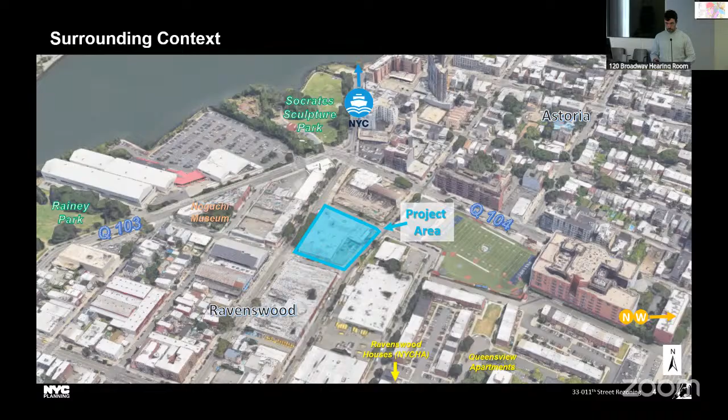In 1961, the project area was mapped to its current R5 district, despite the strong industrial nature of this area of Ravenswood. Blocks directly to the north, west, and south have been rezoned in recent years to include medium-density residential districts mapped with MIH. In the case of the blocks to the north and south of the project area, the sites were rezoned to mixed-use districts within the special MX23 district, as proposed for this project area. I'll speak more on this on the next slide.

The surrounding area consists of a mix of industrial, residential, commercial, and community facility uses. South of Broadway and west of 13th Street is predominantly industrial, while north of Broadway is predominantly mixed use and residential.

Here we have a closer view of the project area in context with its immediate surroundings. The western portion of the project area is currently improved with the one-story warehouse occupied by the Catholic Medical Mission Board's distribution center. The eastern portion is improved with the one-story garage occupied by automobile repair uses.

The blocks directly to the north, west, and south of the site are all single-story warehouses, but were the subject of rezonings within the last 7 years. The Commission may remember the 2018 Vernon Boulevard and Broadway rezoning to R7A C13 and R6B on the block to the west, the 2021 Broadway and 11th Street rezoning to M14 R7A on the block to the north, and the 2022 11th Street and 34th Avenue rezoning to M15 R6A to the south.

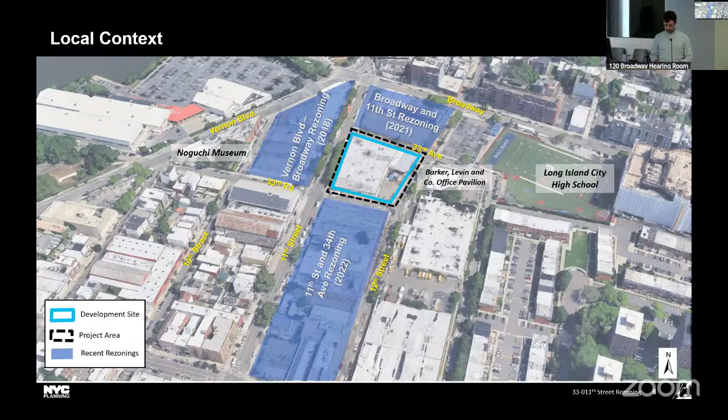Here is another view, this time looking at 12th Street, facing southwest from the development site on the right, and the landmarked Barker, Levin and Co. Office Pavilion on the left.

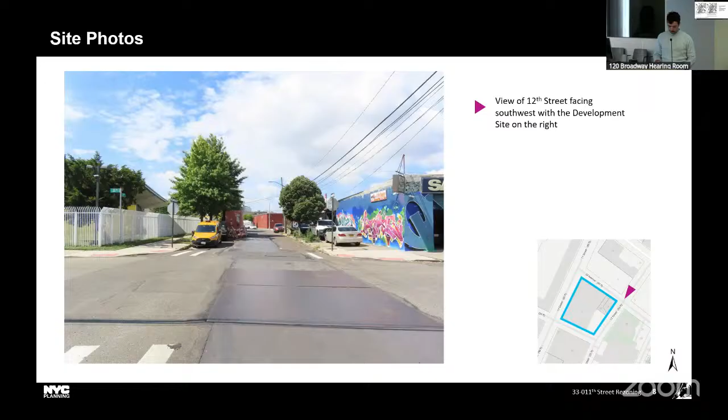According to the applicant, the additional density is appropriate based on proximity to transit, wide streets, and the existing context north of Broadway. The mixed-use district would also reinforce existing land use patterns in the area while introducing new residential and complementary non-residential uses.

M14 R7A districts are designed to permit a variety of uses to promote a mixed-use environment. Compared to the existing R5, the M14 R7A would permit an increase in residential FAR up to 3.6 when including MIH units, and an increase in community facility FAR up to 2.0. The maximum building height would increase from 40 feet to 115 feet. Additionally, this mixed-use district would newly permit commercial and manufacturing uses up to 2.0 FAR.

No parking is required as this project area is within the inner transit zone. The applicant also proposes a zoning text amendment to map MIH options 1 and 2 across the project area.

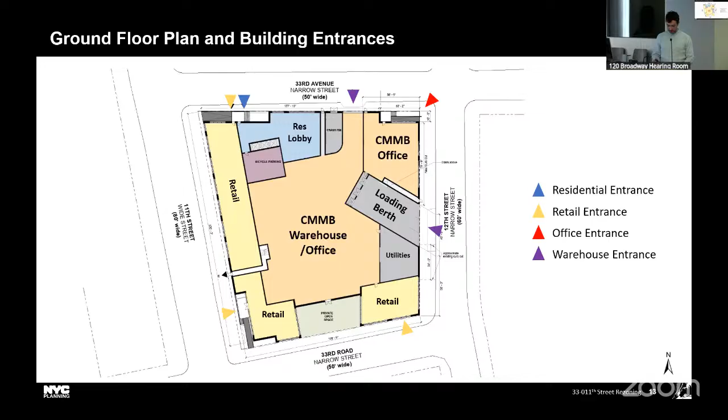This application requires a racial equity report because it would increase the residential floor area by at least 50,000 square feet. The AMI for Community District 1 is approximately 79,000, which is higher than the AMIs for the Borough of Queens and New York City overall.

The applicant proposes to provide 26 income restricted units at 40% AMI, 14 units at 60% AMI, and another 26 units at 80% AMI, with estimated monthly rents ranging from $1,134 for studios to $3,370 for 3-bedroom units. Estimated average incomes range from $45,400 for a 1-person household to $140,000 for a 5-person household.

Of the approximately 190,000 residents within Community District 1, 15% identify as Asian, 7% identify as Black, 25% identify as Hispanic, and 47% identify as white.

Between 2010 and 2020, the area saw a 7% increase in total population. This was coupled with an increase in all population groups aside from the Hispanic Latino group, which did not significantly change.

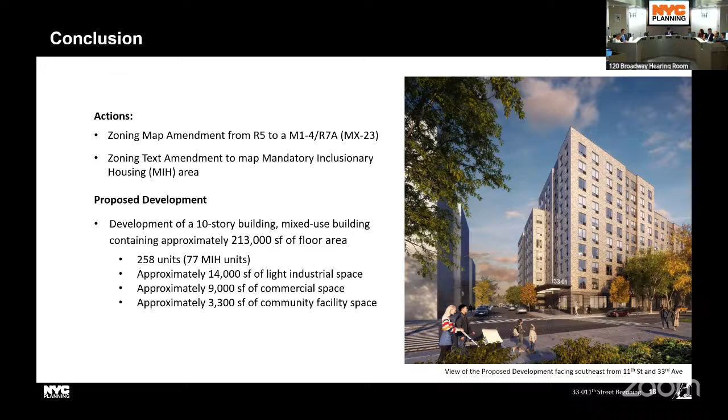Let's move to our pre-public hearing items. We have a bunch of them, items 4 to 9 on today's agenda. I've asked the staff to give a brief update, including the Community Board and Borough President review, so we should be able to move through these with some speed. Let's move to calendar item 4.

The 4th item on our agenda is a pre-hearing review of a notice of intent to acquire office space in the Bronx Community District 6. Our presenter is Cassandra Manriquez.

Good afternoon, Commissioners. I'm presenting 555 East Tremont Avenue. This is an application to acquire office space by the New York City Department of Citywide Administrative Services, or DCAS, and the Department of Human Resources Administration, or HRA.

This map shows the approximate location of 555 East Tremont. It's within Community District 6 of the Bronx. The applicants are DCAS and HRA, and they're seeking to acquire office space for HRA's continued use pursuant to Section 195 of the New York City Charter.

DCAS and HRA are seeking to acquire all of the office space at 555 East Tremont, which will be used by HRA. There are several programs at this location, including temporary cash assistance, Supplemental Nutrition Assistance Program benefits, or SNAP, and adult protective services. HRA has occupied this building since 1968.

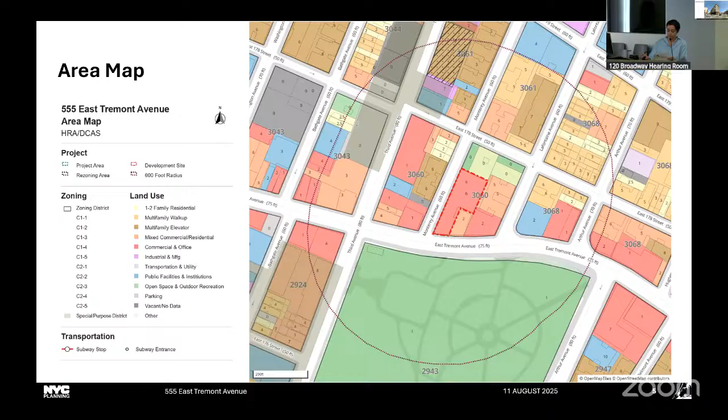This is a view of the site. It's a 6-story office building, which again, HRA completely occupies.

This is an image of the client entrance on Monterey Avenue. As you can see, this building has an inactive ground floor and no windows. HRA serves approximately 1,150 clients a day.

This is the staff entrance on Tremont Avenue. There are approximately 165 employees at this location.

This is an image of the second floor. As you can see, it captures a busy client waiting area.

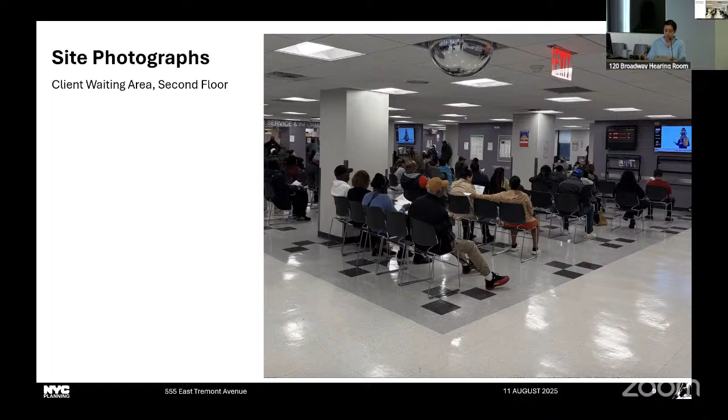This is an image of the waiting area on the second floor, where you can see clients filling out forms and checking in with staff.

The applicant states that they meet the 4 fair share criteria related to suitability of cost effectiveness, operational efficiency, consistency of location, and supporting the development of New York City's regional business districts.

This concludes my presentation. The applicant team is scheduled to present at the public hearing on August 13th, and I'm happy to take any questions.

We'll pick this up at our public hearing, but before we do, we have questions from Vice Chair Knuckles and Commissioner Marin. Let me answer, or attempt to answer, my own question.

Is it the fact that the owner won't sell to the city? Is that the reason why the city doesn't own this building after nearly 60 years of occupancy? That's a good question, I can forward that to the applicant.

I think I leased this building 30 years ago. Somebody before you did that too.

Thank you, Mr. Vice Chair. Commissioner Marin: Commissioner Knuckles pointed out the obvious, and it is a concern, being that the city has been in it for a very long time. And Cassandra, thank you for the presentation, stated the obvious. This is a building with a nondescript first floor that's not inviting, unwelcoming, that I've seen for 62 years now, maybe 61. But it is a building that is not inviting. The staff entrance is horrible. The visitor entrance is horrible. You don't feel welcome there.

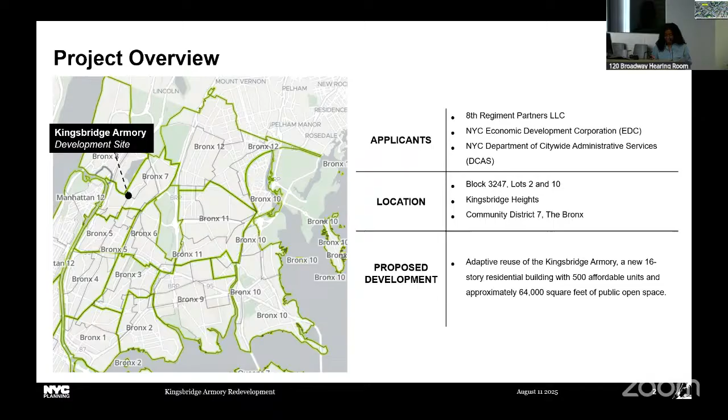This is an aerial view of the proposed project site and its surrounding areas. The development site is surrounded by medium-density residential uses and institutions. Educational and healthcare facilities in the area include Lehman College, elementary schools PS 86 and PS 340, the Walton High School campus, and the James J. Peters Veterans Hospital. The area is well served by public transit - the 4 train line, with a station directly west of the development site, and the B and D lines a few blocks away. Open spaces nearby include Jerome Park Reservoir, St. James Park, and Aqueduct Walk, a linear park south of the development site.

To facilitate the proposal, the applicants are requesting the following land use actions: disposition of city-owned land for both lots that compose the development site, two special permits that allow for an indoor arena and a public garage, a zoning map amendment to rezone the development site from C4-4 to an M1-4A/R7-2 MX district, and two zoning text amendments to modify arena special permit requirements and establish an MX district.

The proposed development has three components: the adaptive reuse of the historical Kingsbridge Armory, a new residential building located north of the Armory, and public open space. The Armory would be adaptively reused and reprogrammed with approximately 567,706 square feet of new uses, including a 17,000-person indoor arena, entertainment uses, light manufacturing, commercial office space, and community facilities. The applicant proposes 248 parking spaces at the cellar level of the Kingsbridge Armory.

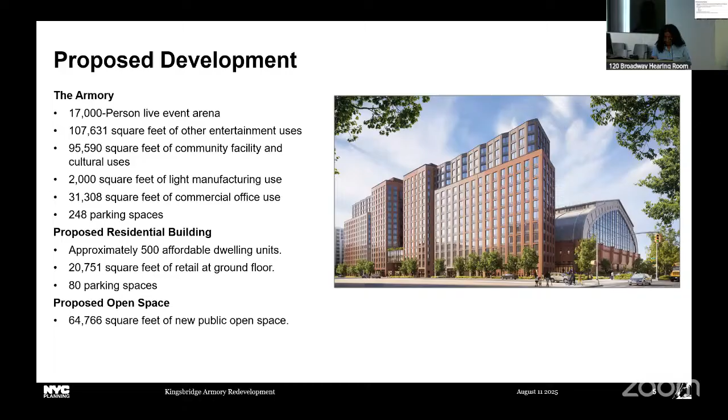The proposal was subject to the City Environmental Quality Review, with the Mayor's Office for Environmental Coordination as the lead agency. A notice of completion of the draft environmental impact statement was issued on May 16, 2025. The DEIS identified adverse impacts with respect to air quality, noise, transportation, and construction, with no other significant impacts identified. Mitigation measures are identified in the DEIS and will be further explored in the final environmental impact statement.

After review and certification of this application on May 19th, Community Board 7 in the Bronx held a public hearing on June 3rd for the application, and on June 17th the board voted in favor of the application with 19 in favor and 3 against.

The Bronx Borough President held a public hearing for the application on July 17th and submitted a favorable recommendation with conditions. The Borough President's conditions include a mechanism for transparency and community oversight on commitments, local and union hiring, appropriate mitigation measures for environmental and traffic impacts, and increasing affordability and size of the proposed units. The complete Borough President recommendation is included in the briefing packages and is available for public viewing on our website.

Since certification of the project on May 19th, the applicant has updated the proposed signage based on review and comments from the Landmarks Preservation Commission. The applicant proposes to add more signage to all 3 facades of the Armory. Updates to signage will remain in scope, and the Department of City Planning is working with the applicant to ensure updated signage remains in scope. The applicant will provide a detailed overview of the proposed additions to the signage plan at the public hearing on Wednesday.

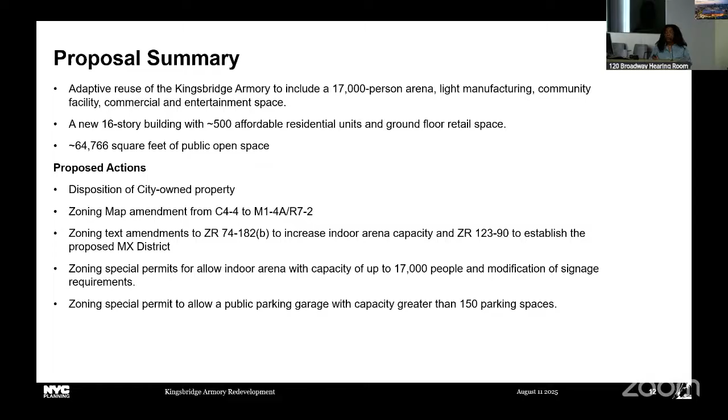That concludes my presentation, happy to take your questions. We'll pick this up Wednesday.

I've got questions from Commissioner Marin, Commissioner Benjamin, Commissioner Goodridge, and Commissioner Osorio.

Thank you, Chair. Camilla, always a pleasure to see you. When this came to certification, I had specific questions regarding the plazas and what kind of seating was going to be there. Has the applicant elaborated on that? They have been working closely with the Department of Transportation and their own team to elaborate and keep working on the plan. I believe they will show a detailed version of the plan on Wednesday. Thank you, I appreciate that.

The second question relates to the housing in the rear. You noted that the Landmarks Preservation Commission has looked at this building for appropriate signage. Have they looked at the appendage being added at the north side of the building, the residential portion? None of the language of that building speaks to the language of the Armory. I believe Landmarks looked at the entirety of the proposal, including the proposed residential building, but it would be best for the applicant to speak to what comments the LPC gave. It's our understanding that LPC has been focusing more on the Armory as the main source of historical value. I think the applicant would be best to describe that.

Yeah, I mean, look, I could understand that. An answer is better than no answer.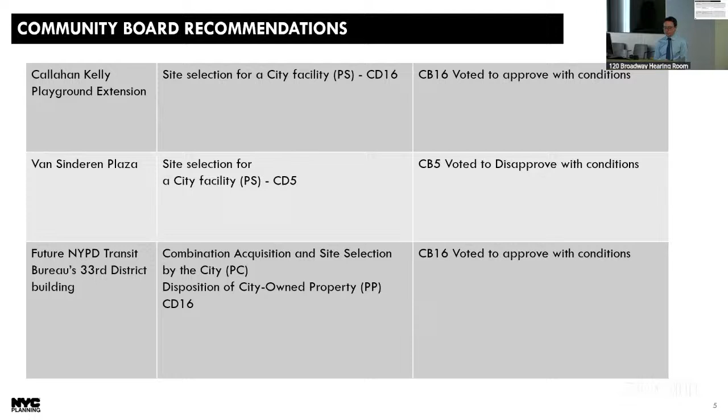All three of these projects would go before the Public Design Commission, or PDC, before construction. This application was split across two community boards, boards 5 and 16. On the site selection action for Callahan Kelly Playground's extension, the joint acquisition and site selection action, and the disposition of city-owned property, Community Board 16 voted to approve with conditions. On the site selection action for Van Sinderen Plaza, Community Board 5 voted to disapprove with conditions. I'll provide a brief summary of those recommendations.

On May 20th, Board 16 held a public hearing and voted to approve with one condition, just seeking clarification on how litter will be managed across the sites.

Community Board 5 held a public hearing on June 17th, and on June 25th voted to disapprove the application with a few conditions, recommending first that EDC provide detailed schematics or floor plans for the NYPD's transit site. Second, that NYPD remove community jail cells, or holding cells, from the plan. Third, that EDC exhaust all possibilities to create an opportunity for the purchase of the full 1508 Herkimer site, where the PD building is proposed. And finally, to revisit plans for public parking in the scope of work for collaborative efforts and funding, asking for parking to be provided for the community board or residents of the area.

On June 25th, the borough president submitted a recommendation to approve the project without conditions. That concludes my presentation. Happy to answer questions. Thank you, Jonah. All right, we'll pick this one up on Wednesday. Okay, let's move on to number 7.

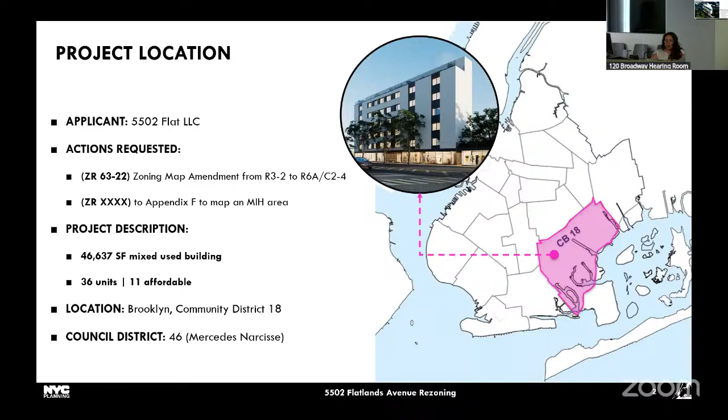The proposed development will be approximately 50,000 square feet mixed-use building that contains 7,000 square feet of ground commercial floor area and 42,000 square feet of residential floor area, which would house 36 dwelling units, 11 of which would be income restricted. The building would be approximately 70 feet tall, with a setback facing Flatlands Avenue at the 6th floor, and a setback facing the rear of the building on the 1st floor.

An outdoor recreational space would be located atop the 1st floor, as the building's courtyard will serve as a common area for all tenants. The building would provide 17 bicycle parking spaces and will provide a parking garage for 15 parking spaces. The applicant is proposing a zoning map amendment from an R3-2 zoning district to an R6A/C2-4 district to facilitate the construction of the proposed development.

R6A is a contextual zoning district that permits a residential FAR of 3.9 with MIH and community facility FAR of 3.0, with a base height of 65 feet and a max building height of 95 feet. Beyond the greater transit zone, parking spaces are required for 25% of market rate units. C2-4 districts are commercial overlays that facilitate ground floor commercial uses up to 2.0 FAR when mapped in R6A districts.

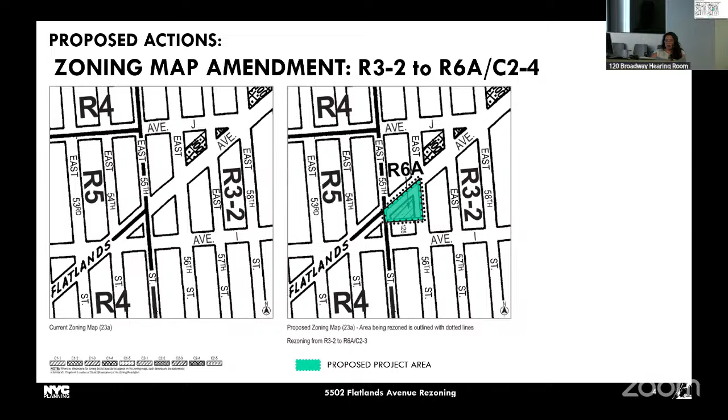The applicant is also proposing a zoning text amendment to Appendix F to map MIH options 1 and 2, each of which require income-restricted housing set-asides, where option 1 requires 25% of units at an average of 60% AMI, and option 2 requires 30% of units with an average of 80% AMI. Since the beginning of the MIH program, no MIH areas have been mapped in Community District 18.

The Community Board met and voted to disapprove this application with 35 against and 1 abstention. The Borough President held a hearing on July 29th and submitted a recommendation of approval on the same evening. At certification, we received a few questions from the City Planning Commission, and the applicant is prepared to respond on Wednesday at the public hearing.

Regarding a question from one of the commissioners about storm flooding infrastructure on Avenue J, we would like to add that the last significant infrastructure project was a DEP upgrade in 2019, which installed new box sewers near Fresh Creek and replaced more than 2 miles of new, high-level storm sewers and nearly 4 miles of water mains to reduce flooding and improve water quality near Jamaica Bay. I'm happy to take any questions. Thank you very much. Okay, we will see this one on Wednesday. Thank you, Kyra. Thank you.

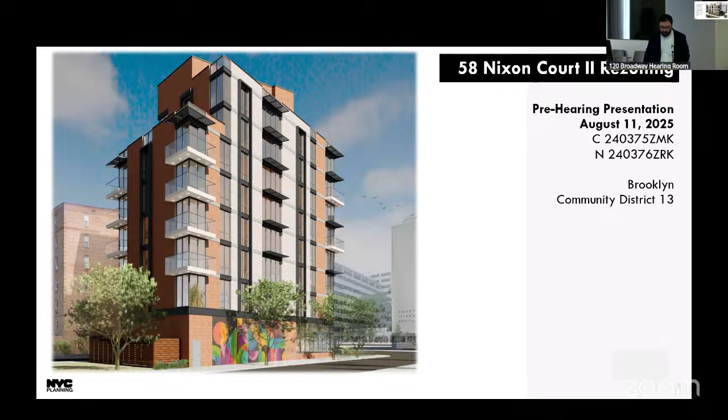Just to recap, this application is for a zoning map amendment and zoning text amendment, brought by SLG Assets Incorporated, for a zoning map amendment from R5 to R7A and R7A C24, and a zoning text amendment to map a mandatory inclusionary housing area to facilitate construction of a new 8-story mixed-use building with approximately 17,000 zoning square feet, or 5.01 FAR, including 19 dwelling units, 4 to 6 of which will be permanently income restricted. The application was certified on April 21st, 2025.

The applicant proposes an 8-story mixed-use building with 19 residential units. The building will rise to approximately 85 feet with an additional 10-foot rooftop bulkhead. The 6-story portion will step down near the adjacent R5 district. 7 attended off-street parking spaces will be voluntarily provided, accessed via Nixon Court. A rooftop recreation area is also planned.

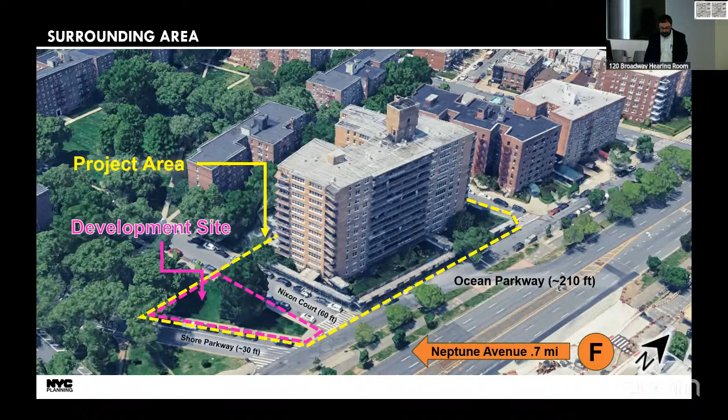The applicant seeks a zoning map amendment from R5 to R7A C24 for the development site, and R7A for the adjacent lot across the street. Rezoning would provide a contiguous R7A district fronting Ocean Parkway, bringing the overbuilt lot at 2650 Ocean Parkway into better compliance. The site is within the Special Ocean Parkway District, adopted in 1977 in response to community concerns about overdevelopment of community facilities and to preserve the residential character of Ocean Parkway. The existing zoning is R5, mapped since 1961 and never modified.

The surrounding area includes a mix of residential, institutional, and limited commercial uses. Residential apartment buildings of 6 to 12 stories are common, especially between Shell Road and Ocean Parkway. The area also includes major institutions like Coney Island Hospital, 14 stories immediately to the east, schools like PS 209 and Lincoln High School, and two Parks Department playground areas, West Playground and Grady Playground, within walking distance.

The elevated F train, serving communities in Coney Island to the south and Gravesend and Kensington to the north, stops at Neptune Avenue Station, approximately 0.7 miles west of the project area. The B1, B4, and B36 buses are available just south of the project area at Ocean Parkway and Shore Parkway, serving southern Brooklyn and linking Bay Ridge and Coney Island to Sheepshead Bay. Bicycle access is available via Ocean Parkway, a protected bike lane extending from Kensington to Brighton Beach.

Community Board 13 held a public hearing on this application on May 28th, 2025, and on June 25th, 2025, voted to disapprove the proposal, 5 in favor, 33 opposed, and 1 abstention. The Borough President held a hearing on this item on July 16, 2025, and on July 25th, 2025, approved the project, stating it would increase the number of approved MIH units in CD13 by 3%. The Borough President also believes the commercial overlay is appropriate in this location, as there are few opportunities for local retail and services in the surrounding area.

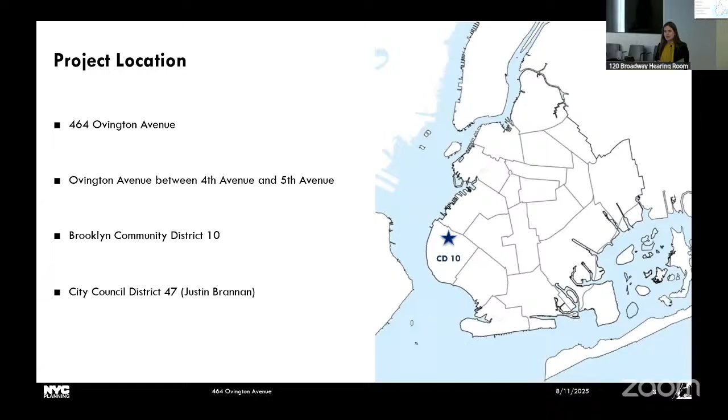The zoning map amendment seeks to rezone the project area from an R3X to an R6A. R6A districts allow a maximum residential FAR of 3.9 with MIH and an FAR of 3 for community facility uses. The maximum building height is 95 feet. Parking would be provided in a cellar level. The applicant is currently proposing 18 accessory parking spaces, 10 spaces more than are required by zoning.

On June 16th, Brooklyn Community Board 10 voted to disapprove this application, 37-0 with 1 abstention. And on July 16th, the Brooklyn Borough President held a public hearing and voted to recommend approval.

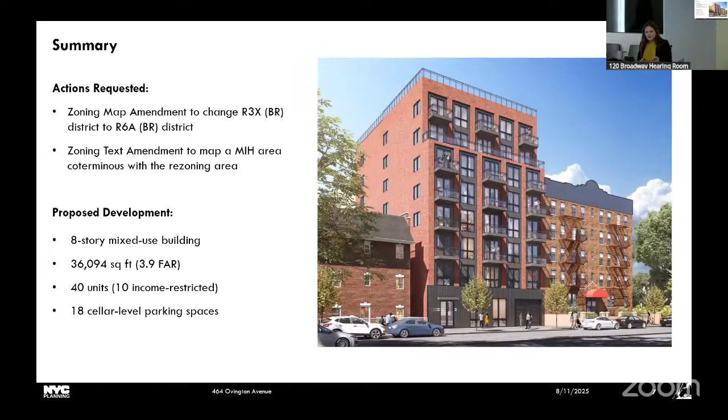Thank you, I'm happy to answer any questions. I also want to note that during the review session, Commissioner Osorio, you asked about the unit mix for the proposed development, as well as energy efficiency standards planned for the proposed development. We've asked the applicant team to speak more on that during the public hearing.

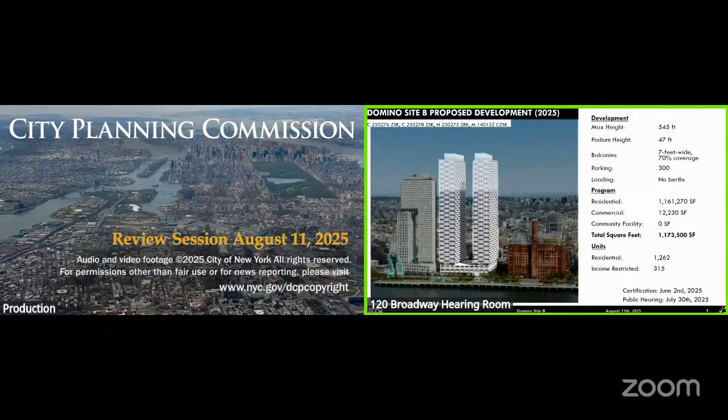I'll pause here for questions related to the post-hearing item before department recommendation. Commissioner Osorio, Commissioner Mann.

Thank you, Chair. Thanks so much for this. Thanks so much for facilitating a very productive conversation with the applicant, and of course, thank you so much for the materials. I really appreciate the thoroughness and the comprehensive response. I just had a quick follow-up question. So yes, I got the summary of the commitments, the general statement on wind impact, and the specific information on energy efficiency, but I didn't see any information on renewables on-site or off-site toward net zero or the ultra low energy designation, if that's relevant here. The other thing was energy storage, and the potential of any type of emergency generation at the master plan scale, given the fact that this is the last building in the puzzle.

Thank you, Commissioner. Happy to pass those questions along for the applicant to address. Thank you, I would appreciate that. Thank you, Commissioner. Go ahead. Oh, I'm sorry, Commissioner Mann. I'm sorry, all good, I just want to say thanks for following up on the SCA information, that was appreciated. Thank you. No problem, sorry about that.

Okay, proceed. The department supports the goals and objectives of the overall Domino large-scale general development. The completed portions of the development include 4.8 acres of open space, including Domino Square and Domino Park, heavily used and activated spaces along the East River waterfront, as well as 4 developments that total 514,000 square feet of commercial and 1.15 million square feet of residential uses. The approvals in 2014 reflect a carefully considered site plan with generous open space and sidewalks that balance taller buildings on a smaller footprint, allowing for appropriate light and air and pedestrian circulation and experience throughout the site.

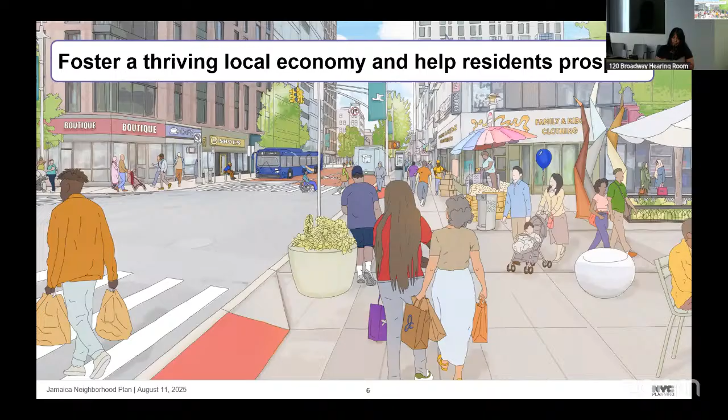Everyone deserves to live in a safe and healthy environment. People in Jamaica get around by walking, driving, biking, and using public transit. The Jamaica Neighborhood Plan seeks to make streets safer for all.

The proposed actions would support the public realm by adding enhanced streetscape rules to major corridors through Tier C regulations. These regulations require active ground floor retail and service uses, increase facade transparency, and restrict curb cuts and parking. Additionally, we are adding street wall articulation rules to break up long building facades. Together, these rules will help create a safer and more vibrant street for everyone.

So a climate and environmentally just Jamaica means everyone can live in a sustainable and healthy environment. The proposed actions would achieve this by requiring industrial businesses located near homes to operate fully enclosed.

We also heard from the community about the need for new green and public spaces. The proposed actions expand opportunities for open spaces in the densest parts of Jamaica by encouraging private development to create public spaces in exchange for more floor area. There is another tool to allow us to create more spaces in Jamaica while we continue to work with Parks to identify other opportunities. As part of this goal, we also heard about the need for improving infrastructure to manage environmental challenges like flooding, air quality, and climate change.

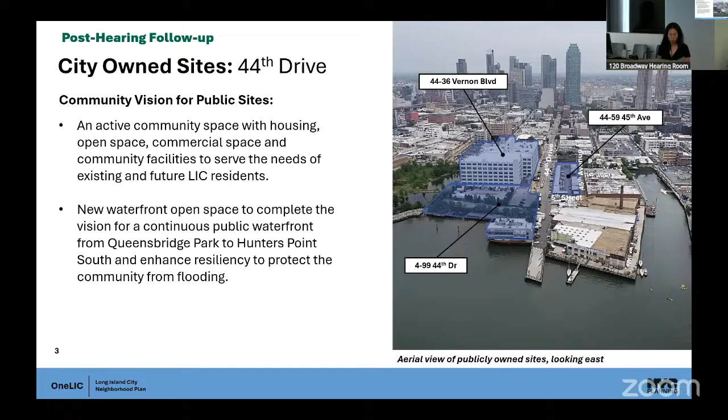On resilience strategies, the WAP proposes to use new open space, soft shorelines, and elevated shore public walkways to address flooding caused by sea level rise and lower level coastal storm events. Doing so will help address the extent of coastal flooding as seen through the 2100s projections on the flood hazard mapper. The WAP is part of waterfront zoning, which is only applicable to waterfront blocks or lots with a boundary coincident with or seaward of shoreline or abutting a park along the waterfront.

As such, the boundaries of the waterfront access plan and requirements for the WAP cannot be exceeded inland of waterfront blocks. While there are limits to the extent of waterfront zoning, the city promotes flood resiliency in other critical ways. For instance, flood resilient construction requirements as laid out in Appendix G of the New York City Building Code apply to new and improved structures within the floodplain. These standards exceed those of FEMA and are intended to help sites withstand storm surge.

Additionally, to increase industrial resiliency on a citywide basis, recommendations from City Planning's Resilient Industrial Report have already been implemented by the Zoning for Coastal Flood Resiliency Text Amendment and the rulemaking by the Department of Environmental Protection. City Planning's Zoning for Coastal Flood Resilience Text Amendment of 2021 encourages flood protection in commercial and industrial buildings with floor area exemptions and flexibility in the measurement of building heights to accommodate flood-proofing measures.

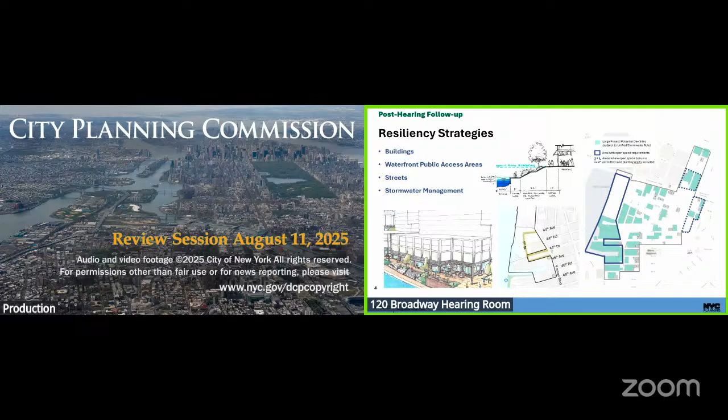That's the spirit of the question. Thank you for clarifying that the waterfront access plan restricts you, and that there are constraints on where this applies. I was offering the idea of expanding the blue line on the map to encompass other places that are highly vulnerable and were impacted by Sandy. Thanks for clarifying the constraint you're operating under. My question is, what else can the city do in areas that are also very vulnerable outside the blue line, where the waterfront access plan is effective? Otherwise we're increasing residential density without meaningful infrastructure improvements to mitigate flooding. Another question is about storm surge, but let's stop there and hear your thoughts.

Thank you for that question, Emily. Good afternoon, yes, thank you for those questions. You're correct that with the WAP, we're using a very particular tool we have at our disposal in a relatively specific part of the study area, geographically.

One thing I want to highlight is that the city now has the Bureau of Coastal Resilience, established in 2023, with whom we've been communicating throughout the study. Coastal protection planning on a large scale that can take portions of this neighborhood out of the floodplain, or include deployable elements, is extremely difficult. The Bureau has been charged with that difficult task of coordinating the planning, implementation, and operation of coastal protection systems. We're continuing to work closely with them to develop long-term strategies for that next generation of coastal protection in the city.

I think there are critical components of the waterfront access plan that will play a large role here, such as maintaining open space on the water's edge. That's what I can contribute in terms of the longer term.

Thank you, I appreciate that and I don't disagree with you. I think it's an important and necessary contribution, it's just that it only applies to a very small portion of the rezoning area. So anything you can do to anticipate what you've pointed out, which is going to be handled by another agency later, who knows when, is a concern I have.